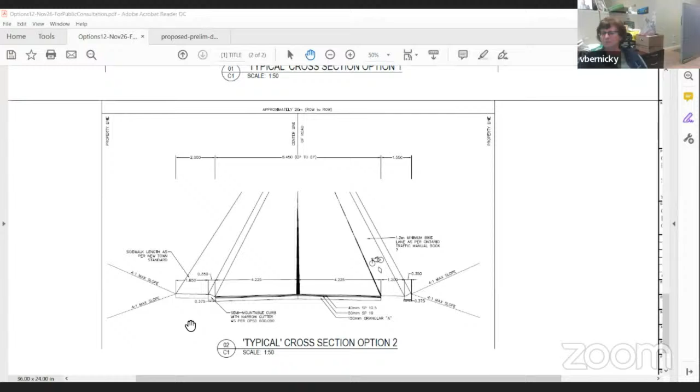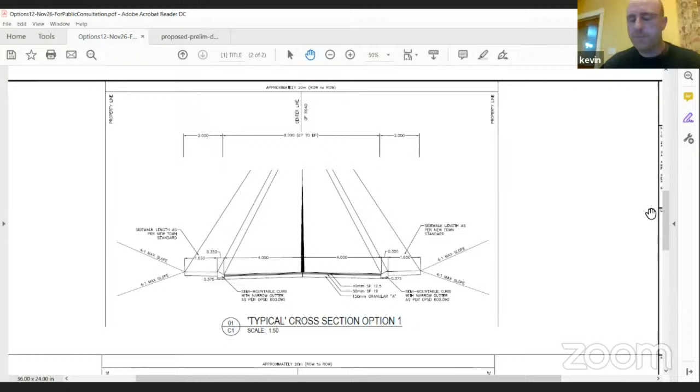So I'll step back. Here's the typical cross section one. It's not that much different than what you have now. It's sidewalk on both sides of the street. The road, I believe, is a little bit narrower, but that's because the sidewalk is going to a 1.65 versus what's there now, because we have to meet accessibility requirements. The other change you might see is we're not going to go monolithic pour, which basically means the sidewalk's one piece. We're going to put a curb in front of it. That's just a new town standard.

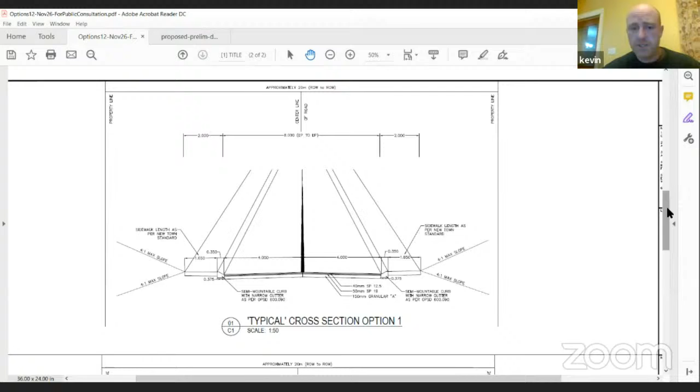And then the second option down below, if everyone can see, is removal of the sidewalk. I believe right now it's on the east side is the recommendation, and put in a bike lane for this option. Now, again, we're just looking for input at this time, what the community feels about a bike lane. It's more of a public input. From an engineering standpoint, I'm more interested in the pipes underneath the ground. I just need to know what to put back on top of the pipes in terms of sidewalk or bike lane for me to continue in my design.

And now, in saying that, the design is still very early. Anticipated construction for this project is not till 2024, and there will be more public engagement once a detailed design has been completed.

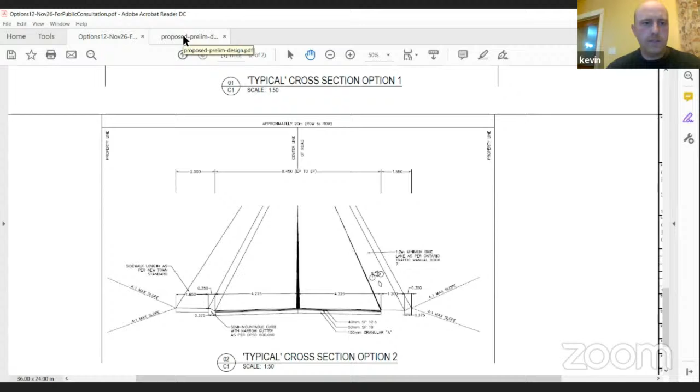I'll see if this works or not. Paul, can you let me know if you're seeing the plan for these streets? Okay, yeah. That's good. I got a thumbs up.

So this is kind of, we are working on this. However, there will be meetings in the future to talk about individual homes and what's going to happen to your sidewalks, sump pumps. Like I said, it's still too early in the design phase. Right now, I have sidewalks going back on both sides. But if I remove that one sidewalk, that's going to change a lot of things in the design. So at this point, that's where we are, kind of at the crossroads.

I should also mention there's a small section of water main that's reached its life capacity. So it will be changed also at the same time as we're doing the storm water. Additionally, there will be questions about detours and access. Generally, this will run like Lawrence Street. It'll be access for residents only.

There may be some minor interruptions to your driveway over a period when they change out your water service or sanitary service to your individual homes. But in general, the contractor allows access to your homes during construction. And that, again, is not slated until 2024. And in the meantime, between now and then, we will have more public sessions to gather that information.

Right now, we're just preparing this for submission to the MOE because we need that for the design of the storm system in connection to the new storm treatment system that was placed, I believe, 2 years ago now on the end. So, Paul or Vanessa, do you have anything to add at this point before we start taking questions?

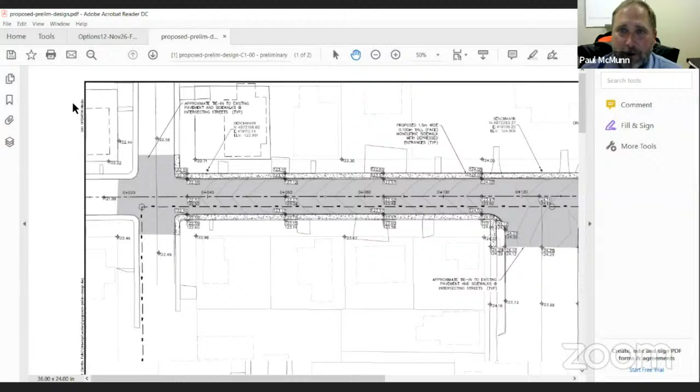Yeah, so the only thing I would add, Kevin, well, just reiterate what you said for people that are on the call this evening. Like Kevin had mentioned, the cross sections that were proposed, we're not married to one or the other. Currently, we have sidewalks on both sides of the street, and the first option at the top of Kevin's screen suggests basically a like for like scenario, albeit everything will be replaced underground and new stuff up top.

Like I say, we proposed option number 2 for a cycling lane in that cross section. But again, that's just more for conversation with people on this call to see if there's any type of an appetite for a cycling lane on this particular street or not. We're at the early design stages, but like Kevin mentioned, in order for him to finish his design for sewer, water, and storm, whatever the consensus is will inform that design, because those pipes under the ground might move from one side to the other depending on how much physical room is within the road allowance that we can actually use.

So that being said, we definitely want to hear from everybody here this evening. The one thing we're not wanting to get into is a discussion about private properties and what's going to happen at my particular property. Like Kevin said, it's far too early to get into those conversations. That'll be at a later date once we push out communications closer to construction time in 2024, where we'll be talking and consulting with individual property owners to know what some of the limitations or issues are

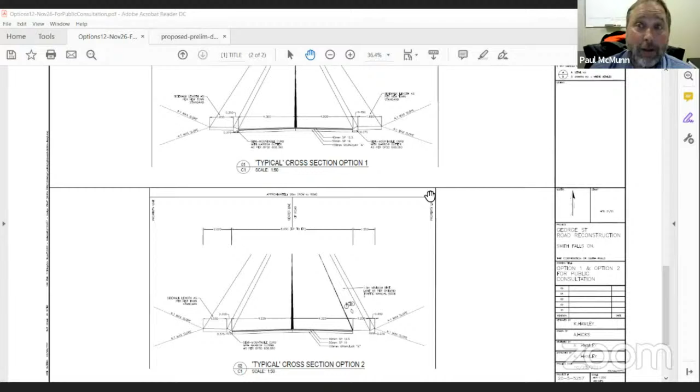Another thing would be if you had an appetite to perhaps widen your driveway, this would be the opportune time to depress curbs to accommodate a wider driveway. So those are the types of things we'd be interested in at a later date, to have conversations with private property owners to make sure those things aren't missed, because now would be the time to do it, before we go to tender. So with that, anything you have to add, Vanessa?

No, I think what we'd like to do now is open the floor to any questions from those taking part today. You can either type it into the chat, or raise your hand and let us know if you have a question. I do see we have our first question here. Does a bike lane mean no parking on that side? Can you provide the current measurement of sidewalks so that we know how much larger they will be?

I can answer the parking. If there's a bike lane there, there will not be parking on that side. That's an easy one. Vanessa, you might have to help me with the existing width. I believe your standard is 1.5. 1.5, so approximately 6 inches wider. And sorry, I'm not typing in response because we'd like this video recorded, since it's a live streaming event, but that's about 6 inches wider, and no, there wouldn't be parking on that side if there's a bike lane. Okay, that answers that question, thank you very much, Nancy.

Any other questions from the public? I'm Hugh Gardner. I don't have it on video, I don't have the computer and stuff. That's perfectly fine. I'm south of Strathcona, so it doesn't directly affect me other than access to where I'm living. If you start tearing up Strathcona, you're leaving us with one access route, and that includes for fire and ambulance, around Park Avenue. I was just wondering whether the fire truck's going to have to go up by the hospital and come around Albert Street to get to us, or the ambulance.

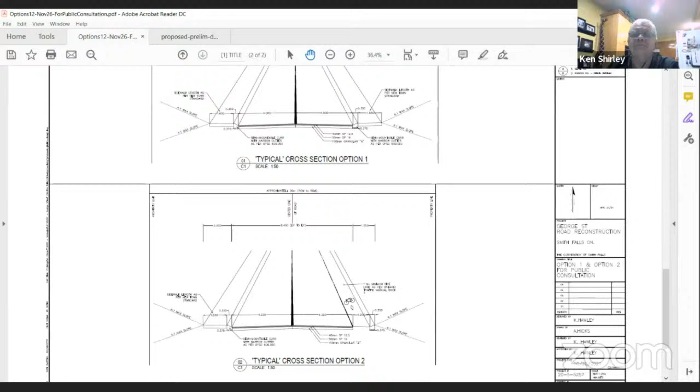What is the timing of the plan, please? Okay, that's an easy one, so I can answer that. The plan right now is to submit this to the ministry, I believe in December of this year. Basically the ministry checks over our team's calculations for the size of the storm pipe to make sure it's adequate to handle the flows. Then we'll start working on the final design, which I believe should be submitted to the town for the spring of next year. At that point, the town is going to look at the costing and their long-term financing. I believe it's slated for 2024.

But this is going to be an expensive project. So the town will look at the drawings, put them on the shelf with all the permits in place, and it will be a budgeting issue when they decide to go forward. From our design standpoint, we're scheduled to have the complete design in May, which means we should probably have another public information session in January or February. We'll have a better plan for individual homeowners to raise concerns about their property. I really want to see sump pumps, questions about driveways, curbs. That's where we're hopefully going to get individual homeowner participation.

And at that point, I would hope I could have it in person, because it's just easier to go over a set of drawings with someone with a pen and mark up that drawing with your driveway or your sump pump line and answer those questions, showing you a sheet. And it's easier for me also. So that's easy enough.

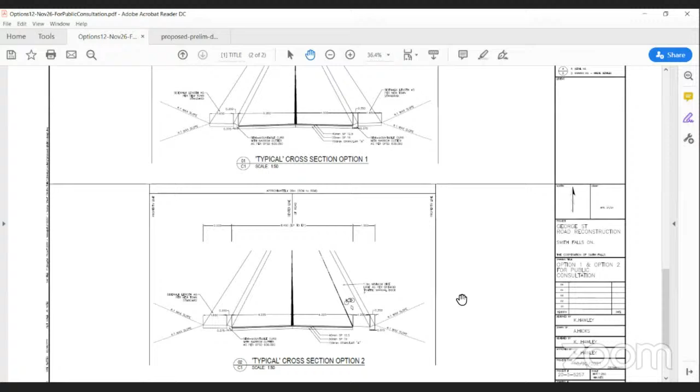Besides other vehicles using it as a shortcut between Abbott and the downtown core, because I think that's where we get a lot of our traffic. But yeah, bottom line is I'd really like it to stay with the 2 sidewalks on either side. Perfect, thank you. Yeah, we want to get this input.

Vanessa, do you see anyone else? You seem to have a better gauge of the screen. Mrs. Novacaska, do you have a comment or a preference? Oh, no, I'm just here. I'm with the Smiths Falls Record News, so I'm just taking in the meeting itself. Thank you very much. Okay. Thank you. Thomas, do you have a preference?

Okay, so Heather, I realize that you indicated that you would be late, and I appreciate you signing in. We're basically taking a look at this option 1 or option 2, and you've had an opportunity to take a look at the drawing. I was wondering if you have a preference of which option you would prefer for George Street.

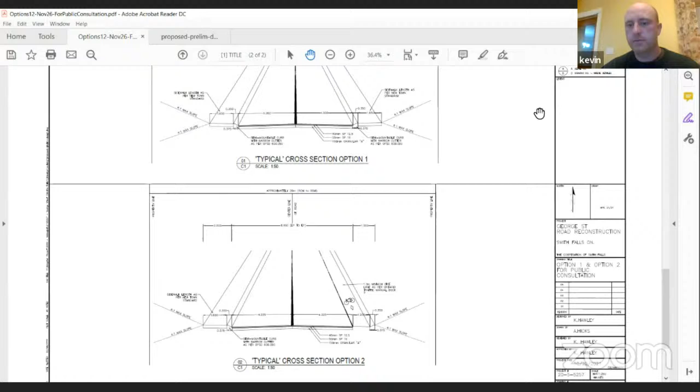Oh, I'm sorry, Jay. Yeah, Jay, do you have a comment? You'll have to turn your mute off, Jay. Yeah, I should know better.

No, thanks to people for coming. I'm a councillor in Smiths Falls, and I'm on the traffic advisory board, and I really appreciate hearing this. It's just a listening session for me. I have my own opinion. I know this will come to council. I don't know that it'll come to council this term, but it's good to hear from the residents, and I appreciate everybody coming. Awesome. Thanks so much. Thanks for showing up, Jay. We appreciate your input.

Okay, with no other comments from anyone, I think we will conclude our open house for this evening. As I said before, we will have the recording available, and if you have any further comments, please let me know. All right, so thank you, everybody, and have a great night.